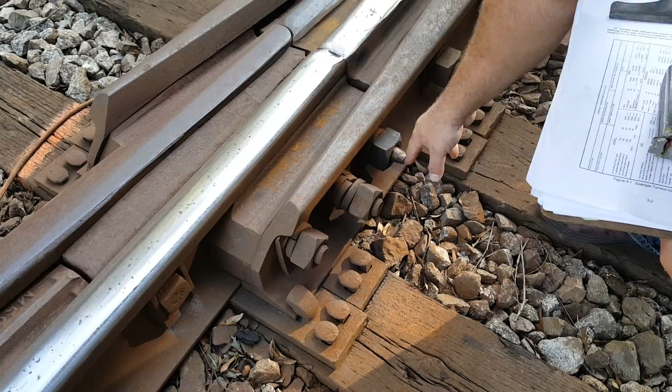We're coming up on the heel, what's called the point of frog. All right, we're going to come back to this spot. These are heel bolts right here. This section right here, that's the heel. One time I found two broken heel bolts - they were broken off in the center. That's a big no-no, that means it's got to be worked on.

This is called the point of the frog and the throat. These are guardrails right here. Inside you see some rocks - that's some kind of debris in the flangeways. Here's a flangeway, here's a flangeway. This is the other guard arm.

This right here is called the closure rail. The main line is not as rusty - you see the closure rails are rusty.

We're going to walk up to the crib, looking for any defects in the ties. Let's see, we'll do the frog and the guardrails.

All right, we've got to check the guardrails out one more time. The guardrails - are they straight? Straight, okay, improper, noted. The condition, they're straight, improper, noted. The fillers, okay, the bolts are straight - not loose, damaged, or missing.

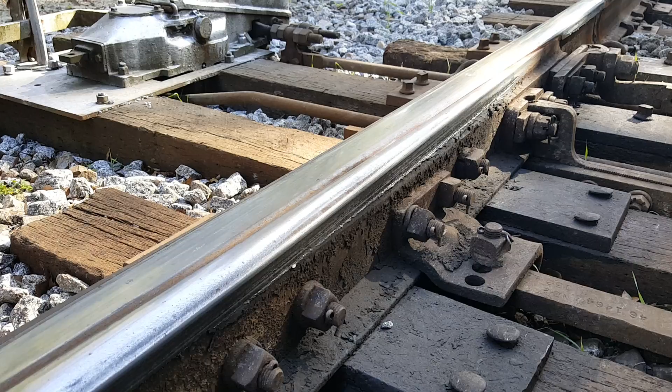Right here is a switch plate, and there should be switch rod clips, switch rod clips, and switch rod bolts, and then you have the connection rod bolt. These are the connection rods. Keep looking down the track, see if everything's good.

All right, this is the switch. As you noticed, there's a lock right on the padlock. There should be a jam nut - the jam nut is around the front of these, switch rod 1, switch rod 2. And we're going to take a quick look over here.

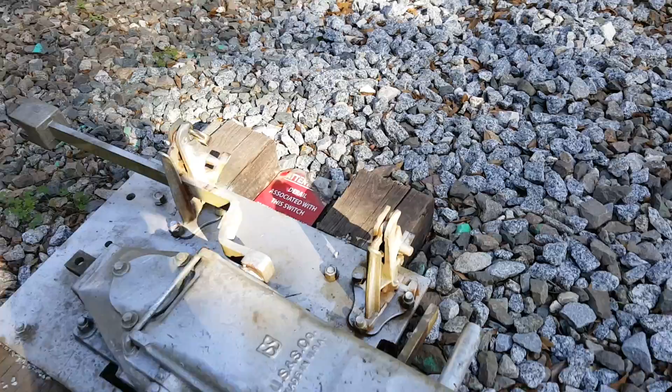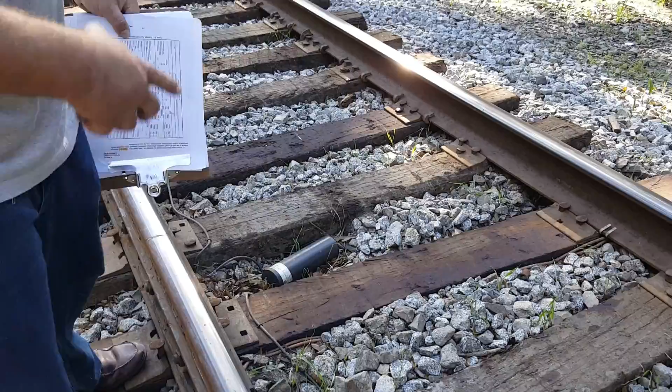Over here we see electric, this turns on the lights. Back in the day, me and my homeboys used to take galvanized fence and run them down the railroad and turn on the lights, which is illegal to do.

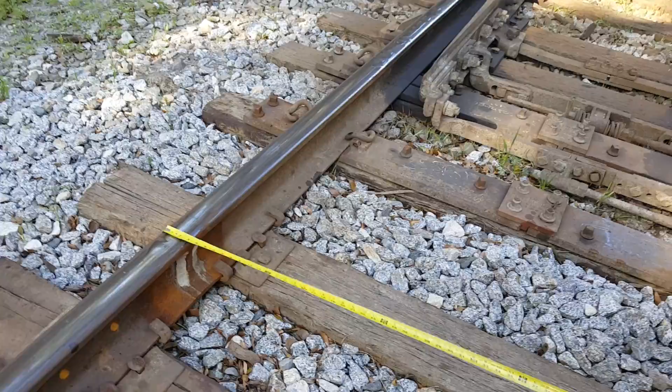All right, we're continuing looking down the rail, both directions. See this seam right here? This is the point before the crib, which is actually the inside diameter is 56.5 inches. That's your standard rail gauge.

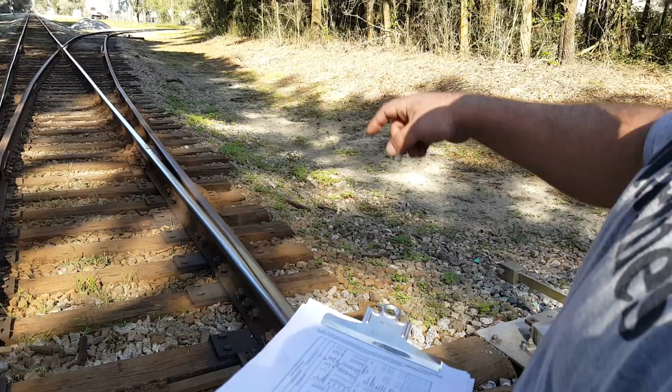All right, we did the heel, let's see. Heel fillers, heel bolts are in there. We stopped the heel fillers and heel bolts. Heel joint bolts and shoulder. Okay, moving on.

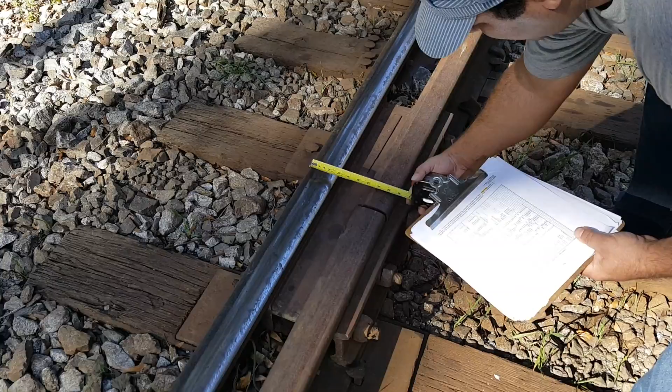Right around here, you're gonna check and see if that point's below the stock rail. And that point's beyond the stock rail is higher. Check that out around the heel bolt. These heel bolts are on. These are the heel plates, the heel filler plates, heel bolts. We did the switch plate ties.

Pretty much the last thing we got to do is go up there, and I'm gonna show you how we measure the gauge on the frog. These all got anchors. That's a fresh bolt. Those are two fresh bolts. This once was all popped up. All the nails was popped up on the running rail from about this seam to this seam.

This is called your closure rail. These are your main track rails. This would be the running rail if you're going this way. Other way, backing in, whatever you want to call it.

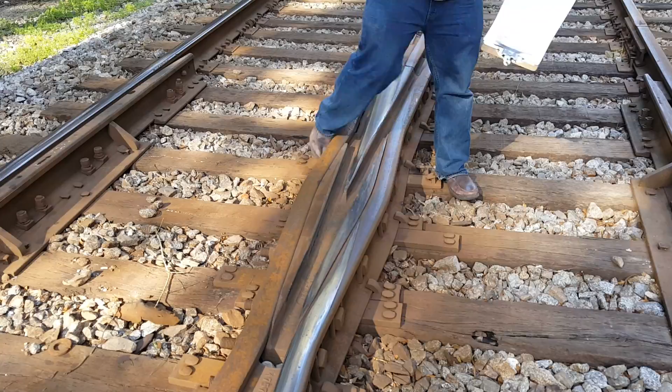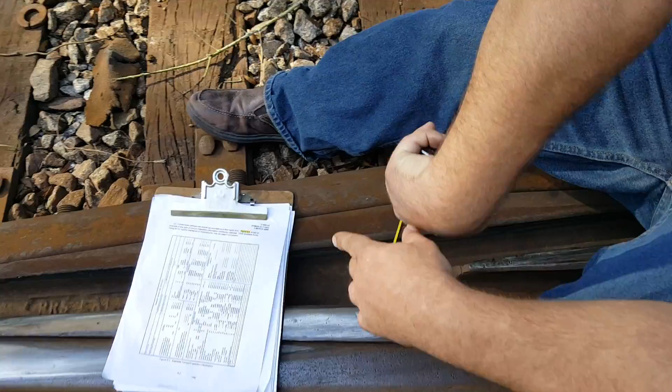All right, the heel is measured like this. As you see, they left notations on it. We're looking for 54 3/4. It says 53 and 54 3/4. 54 5/8 and 5/32. All right. This little throat here should be a half inch, 6 inches out. 6 inches, half inch. That's the point of contour of the frog. Tell me if we look good down the railroad.

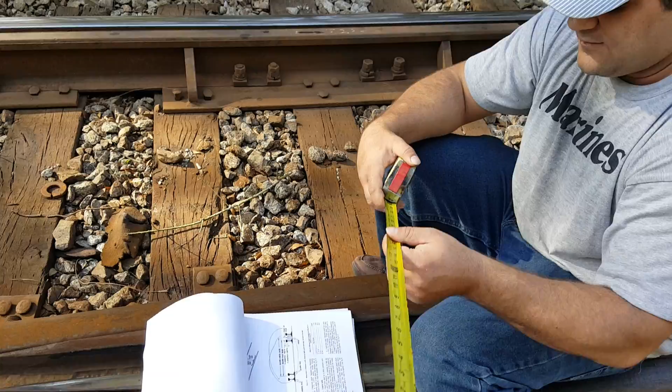All right, for frog flangeway width, we're gonna be looking for a standard, fully newly restored. The frog flange width is actually from the inside of the guardrail to the inside of the throat, which I got 54 3/4 of an inch. Which is standard. That's 54 3/4 of an inch. Our guard check gauge. That was our guard check gauge.

54 to the center of the point of the frog. From the outside of the guardrail, from the running rail, the guard check gauge should be 54 5/8 of an inch, which is pretty damn close because I got 55.

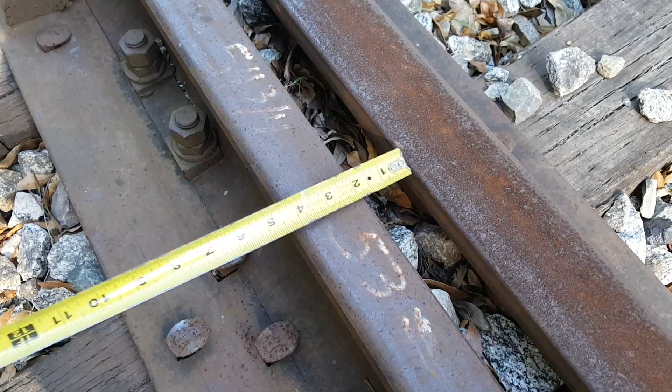The guard face gauge, I'm gonna tap on this. The guard face gauge is to be 52 3/4 of an inch, and the guard face gauge is from this side of the inside rail. You put this side of the inside guardrail to the inside, not in the middle of the throat, but on the side, which is actually about 52, 53 inches.

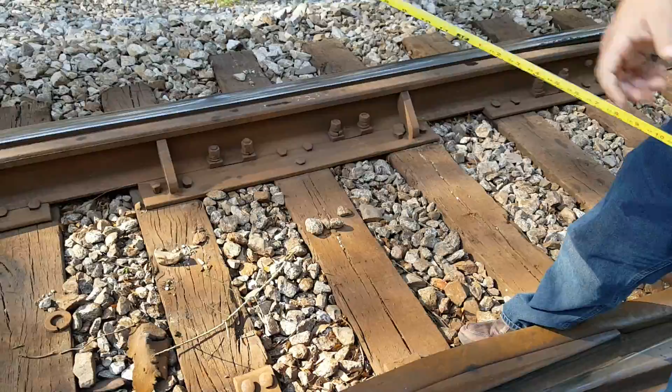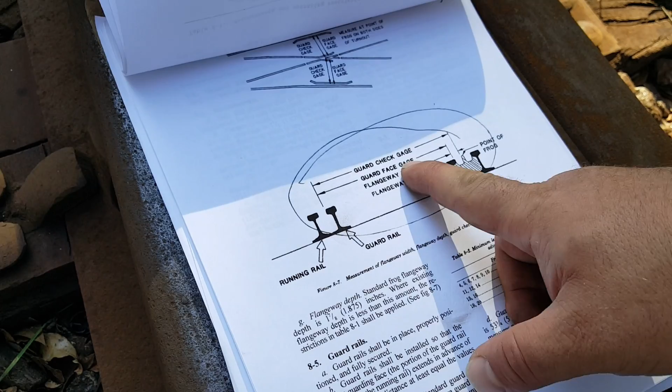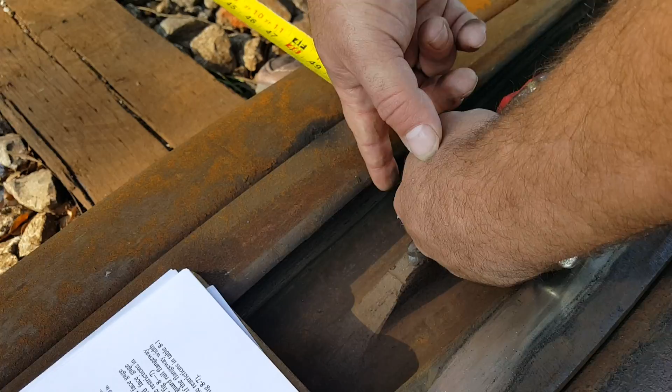Well, I'm not gonna bother because I know they rebuilt this, but we're just gonna show you, and then you do the guard face gauge. Then you do the same thing. If you look at the page: guard face gauge, guard check gauge, flangeway width, and flangeway depth. The guard face gauge stops in the inside of your throat of the frog. So this guard face gauge goes to the outside of that rail over there. And I got 52 and 7/8 of an inch.

We got a train coming, so let's go off here. I think we're good. I don't think we set that off. All right. Due to the train bell going off, we're gonna get the hell out of here. Hope we can show you tomorrow. Well, we can go back one more time. What else do we need?

The guard face gauge, check gauge, point of frog, guard face wear, guardrail, width of the flangeway. I'm gonna take the width of the flangeway, this depth. The flangeway width is from the inside to that outside rail. Like I said, it's better to use a ruler because a ruler's straight. And you want to take the flangeway depth, which is actually from about there to there.